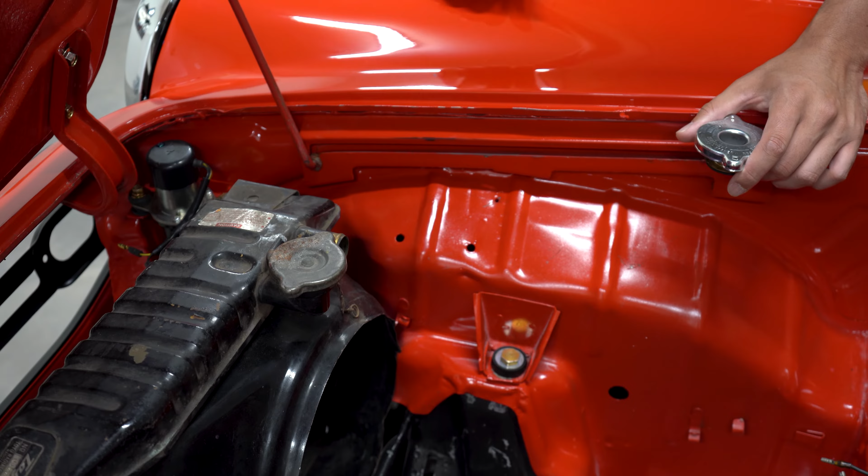All right, so without further ado, let's go ahead and dive right in. To start off, we're gonna be looking at the radiator. What we're doing is we're gonna be replacing the radiator cap. Now, this is one of those maintenance things that you have to do down the road. And we're gonna be removing our old one.

As we removed it, some stuff just started coming off. And as you could tell, I'm pretty sure that the rubber has seen better days. Wow, I mean, I'm thinking this is probably made of brass, but we're gonna be replacing it with a new one.

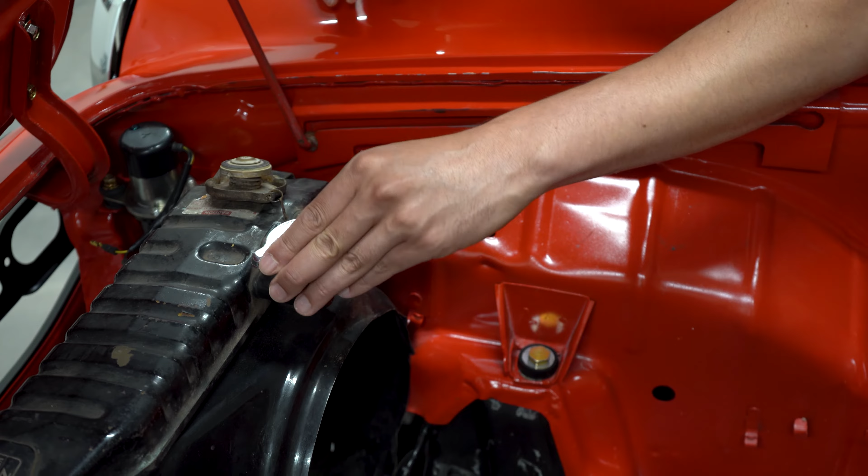And let's put this in here, let's see. If it fits, there we go. All right, looks like it's gonna work. Oh, there it goes, all right. And that's a nice fit.

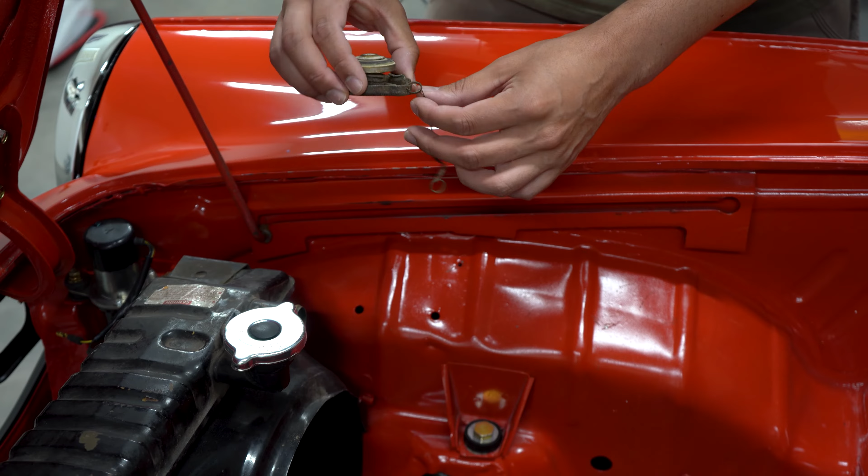So an interesting thing about this one is that it came with kind of like a little 'don't lose me' chain. I don't know if this one has that. I don't think so. But we're gonna go ahead and store this away because we like to keep all our old parts. Some of them we sell, some we don't. But in this case, we're gonna keep this one because we just wanna keep it.

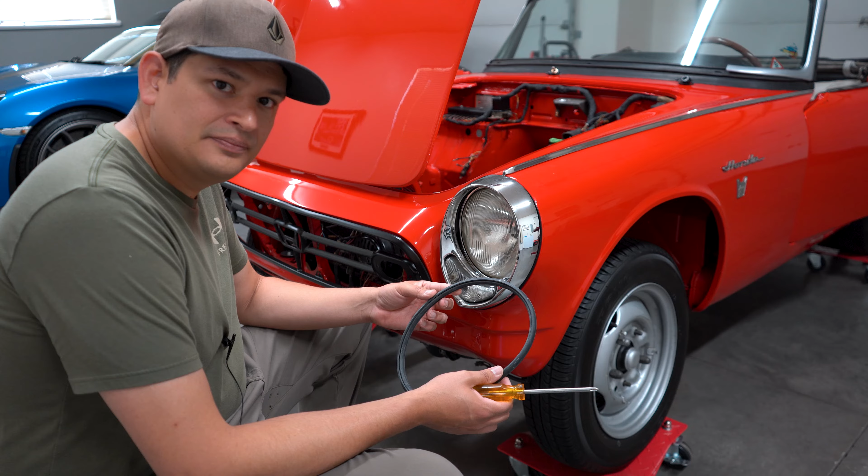So here we have a new headlight rubber gasket just to keep the elements away from this seam right here. And so what we're gonna do is we're gonna go ahead and put that in there. And you would be surprised that this headlight is just being held on by some screws, nothing too complex.

But if I'm correct, this goes behind there. I'm thinking that's right. We should double check. Let me double check real quick, but I'm gonna take this off anyways.

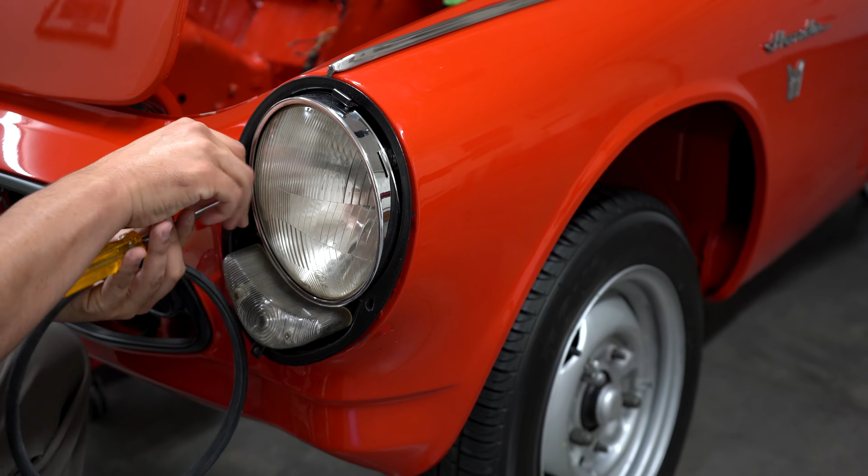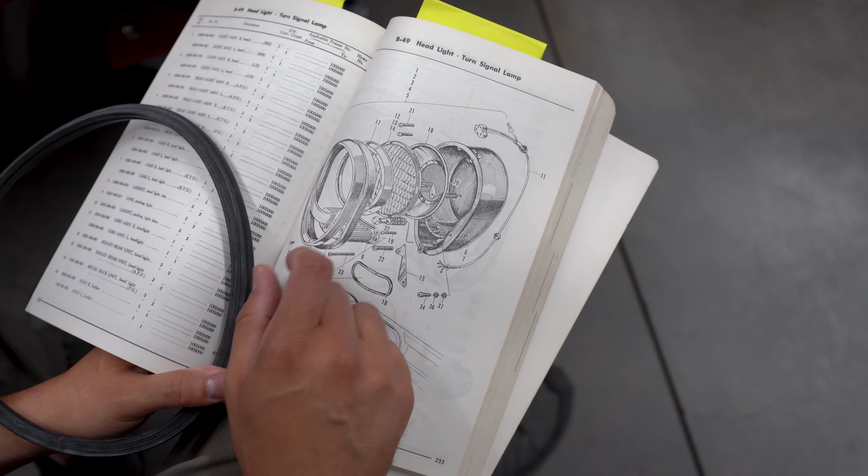Okay, so here's our diagram for a headlight, and it shows that the gasket goes behind the chrome trim. Now let me tell you something about these older parts catalogs or service manuals. I believe, because this is from 1968, that these were hand drawn. I mean, they really didn't have the technology that we had back then for computers and stuff like that to render everything. So I really think all of this was hand drawn.

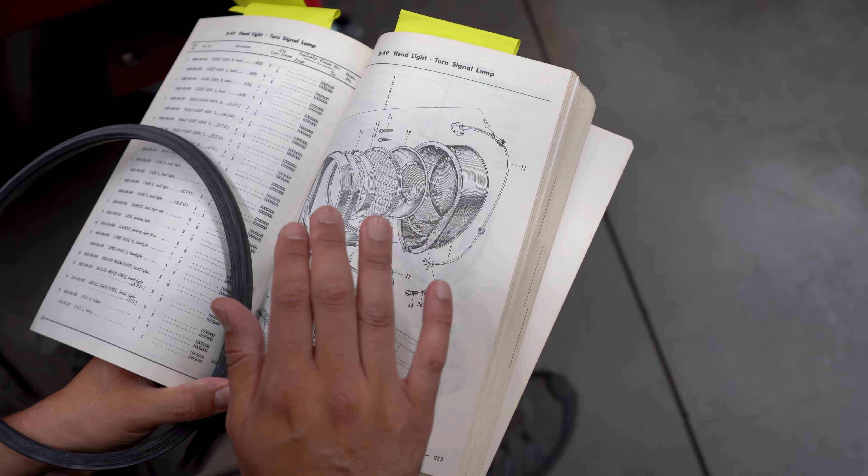But even though it's neat, sometimes parts don't look the same at all. And we kind of found that out when we were looking for other stuff. If you look at this gasket right here, it looks a lot different from the diagram, but this is the right part. It's just one of those things where they were drawing them back then versus actually having a computer system or program that did that.

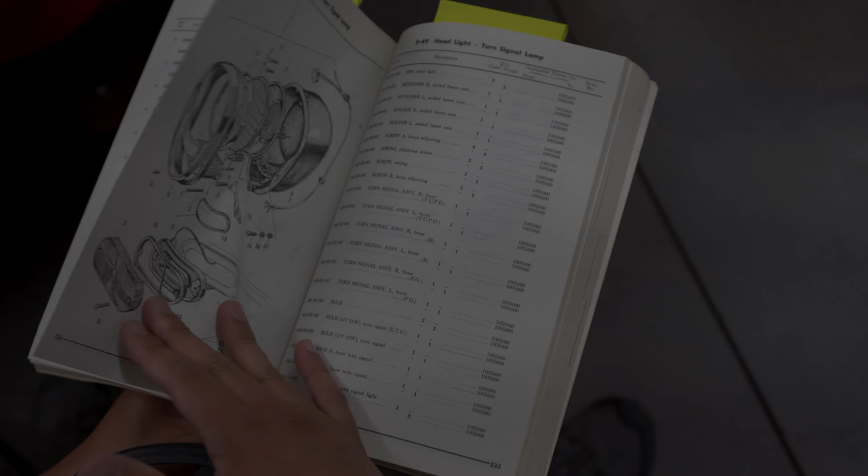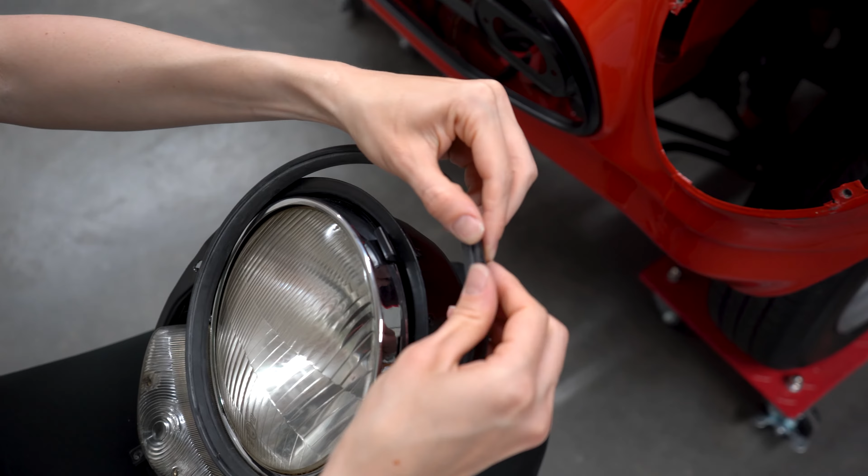So Elise is gonna be doing the headlight gasket. All right, Elise. Okay, so we took some time and really looked at this thing and figured out which direction goes which way. So it's got this flatter side that lines up nicely with the body. And then on this side, it's got multiple lips - a front lip and then a secondary lip. What we figured out is that the secondary lip goes over here and is able to fit on this housing.

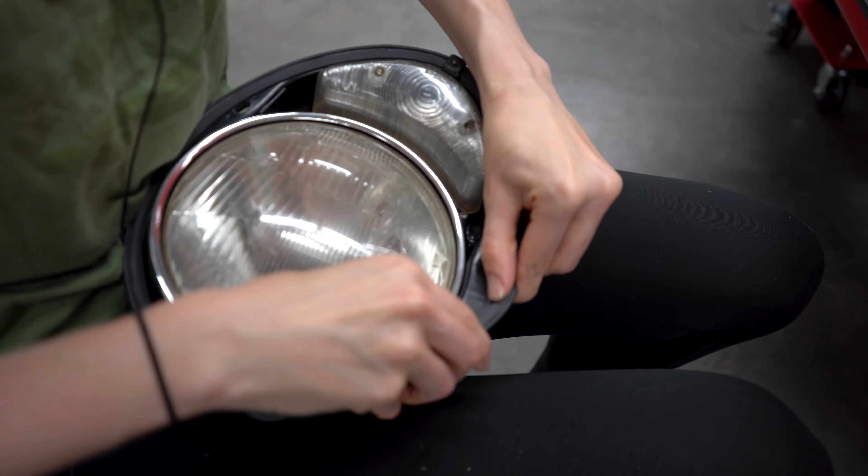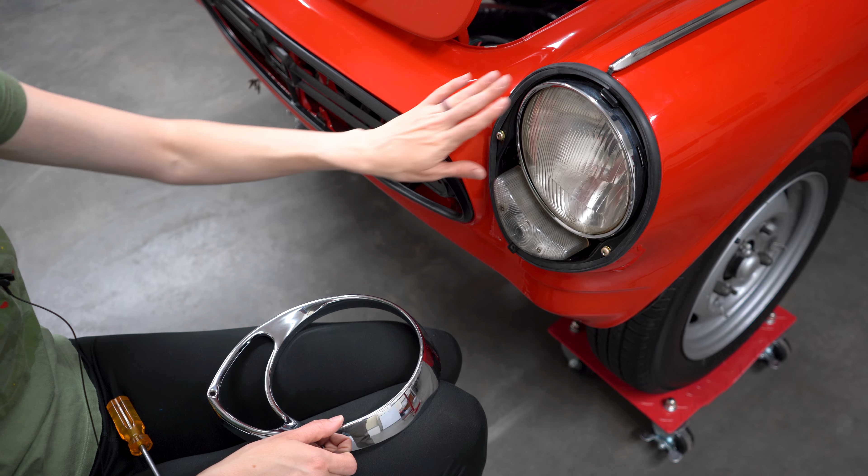And it's a good snug fit. It seats on really nicely. Okay, now we put this whole thing back in. It's in nice and snug, and now we'll go ahead and add in the screws. Now that this is all installed and attached, we're going to go ahead and secure the chrome.

Both headlight gaskets are installed, and let me tell you, it makes a big difference because before, the headlights were loose and there was just a noticeable gap. So if you're rebuilding an S chassis car, you're definitely gonna want some fresh headlight gaskets. The great thing is we actually figured out the direction of the gasket because I initially installed it incorrectly, but she got it down, so kudos to her. This looks great. We rebuilt our headlight, got the covers re-chromed, and now we have a new rubber gasket that's gonna keep any of the elements out of it.

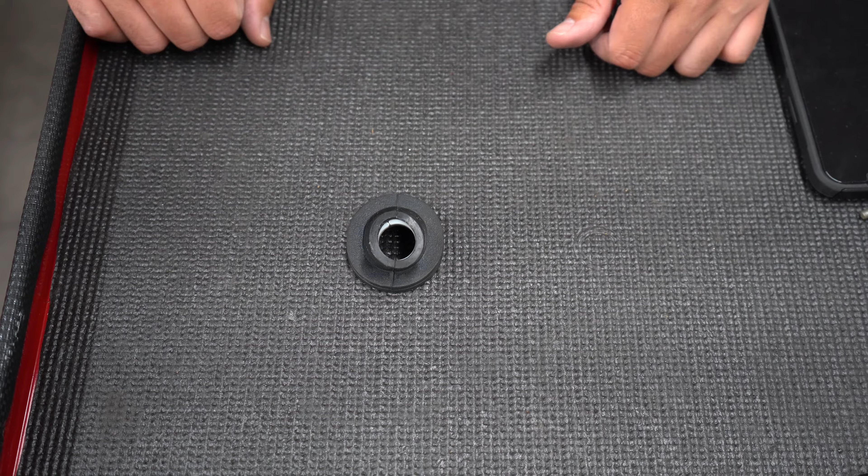Okay, so this was the part that Ronnie sent us, and this goes to the steering assembly. It's kind of like a long rod that goes to the steering rack.

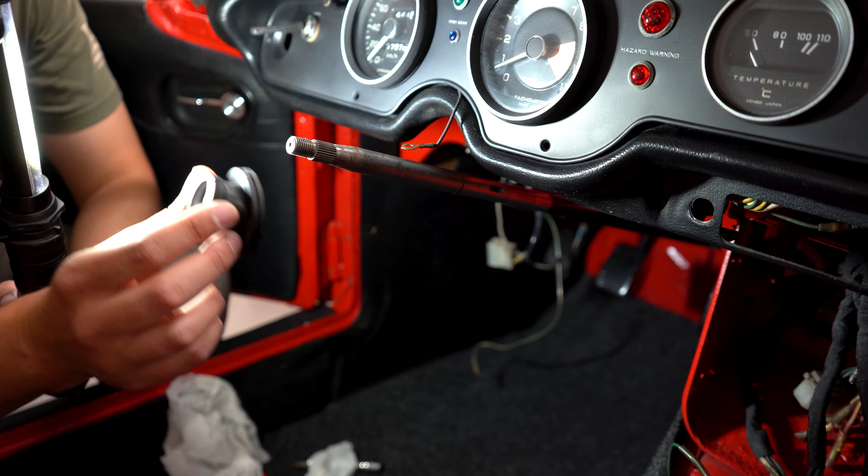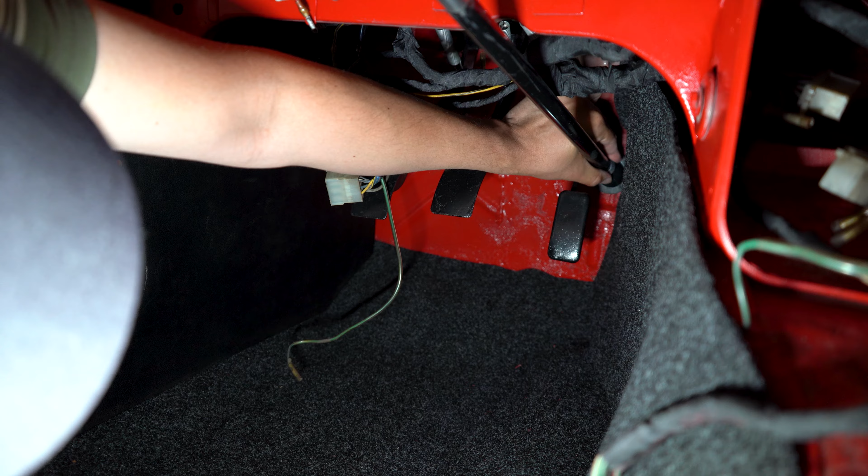What we have to do is put it on, slide it in, and then actually get it sandwiched between the car as far as the engine bay and the interior. So let's go ahead and do that. It's gonna be a tight fit. We're gonna look at the parts catalog and then get it done. This goes on here, and we really can't get the camera where it's gonna go because we have to put it all the way in the bottom. But this is important because it's a separation between the outside and the inside of the car. So definitely an important piece.

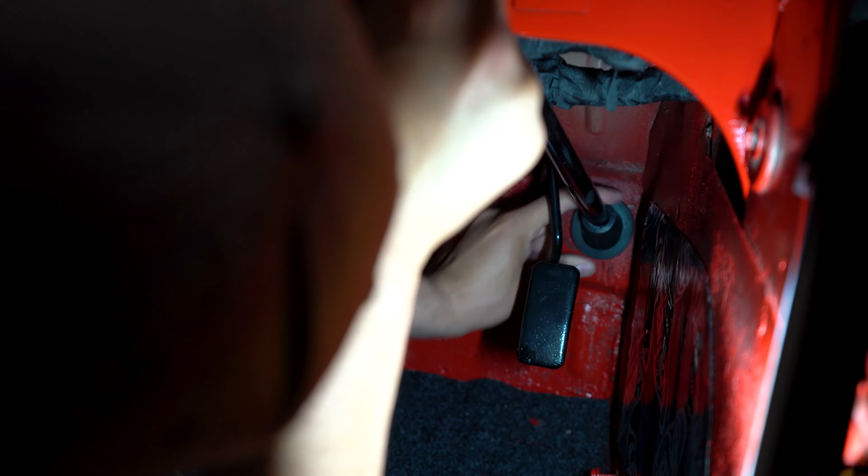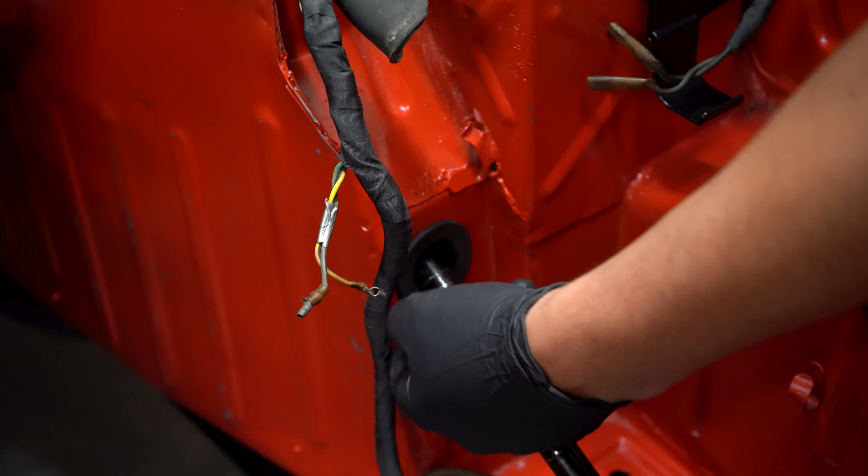Okay, so this was a pain, but we got it in. What I did is I actually pushed it through here, then grabbed it and pulled it out, and then put it in, and was able to get it pushed in slowly. I used a flathead to get some of the harder parts because I couldn't push it with my finger, but we got that bushing in there. And again, big thank you to Ronnie. Awesome.

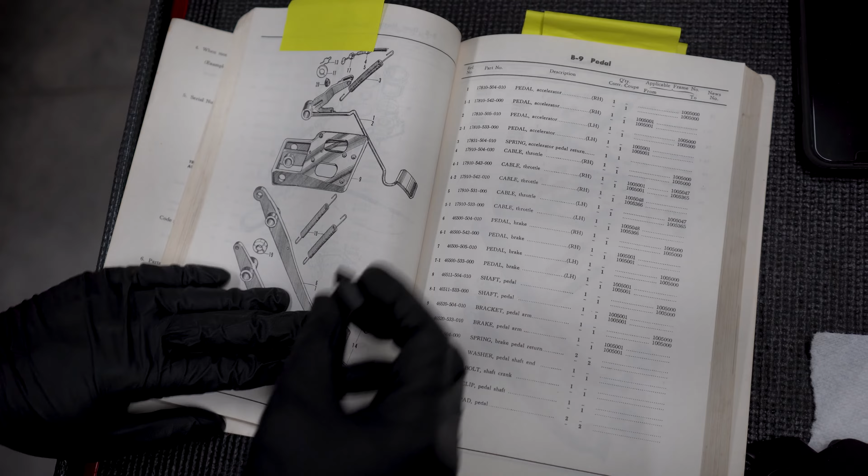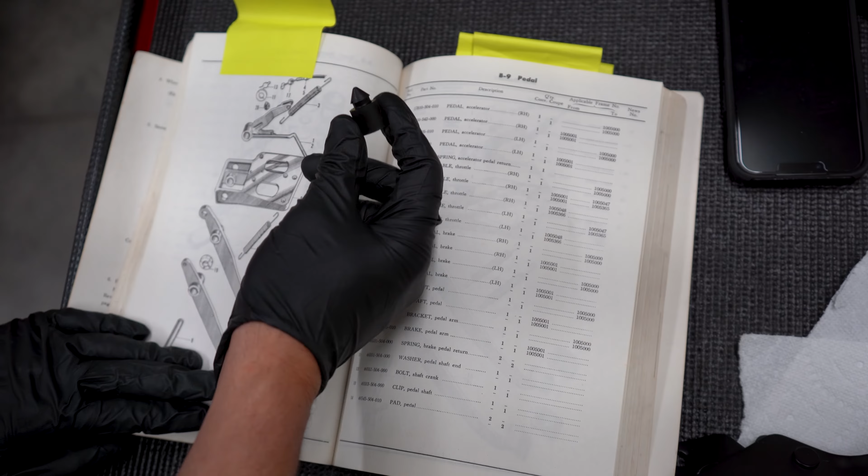Okay, the next thing we're gonna be doing is putting the bump stop for what looks like the gas pedal, if I'm correct here. Let's see, 1, 2, pedal accelerator. And this is gonna be really important. I'm just gonna put it in there because we can't get an angle of that with the camera, but I wanted to show you guys this was missing, and this is one of the small things that we wanted to make sure we had.

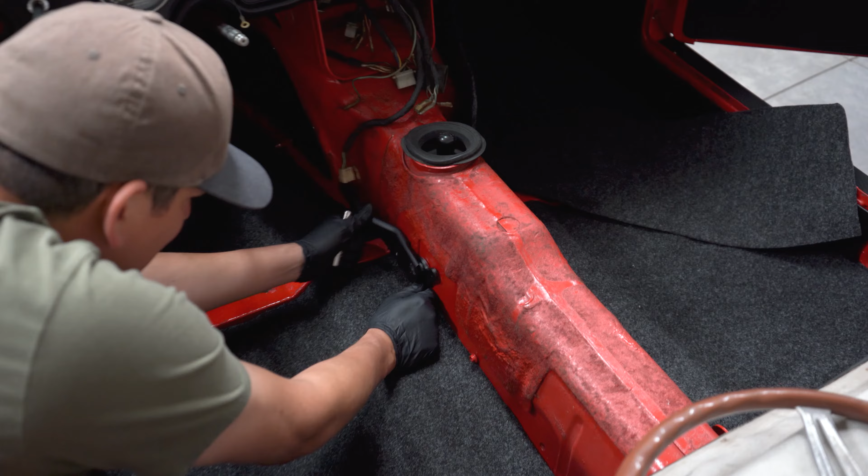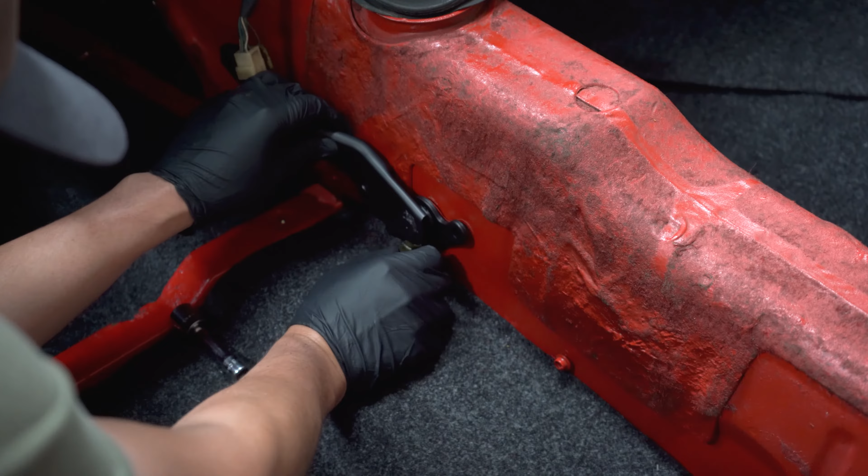All right, so this is our e-brake assembly, and let me tell you, it looks really good. We had it Cerakoted, and the reason why is because it's got kind of a gear system in here, and we wanted to make sure that if you painted it, it wouldn't get caught up. So we're gonna go ahead and put this on. Let's do it. All right, pretty simple install. We're gonna have to hook up all the actual e-brake setup later on, but for the time being, we're gonna put this in here because there is no better placeholder than where it's supposed to go.

It's the drifting mechanism.

And the thing about working on a car that people have restored or worked on is that this car was repainted and then these bolts were re-zinced. So the mating surfaces are gonna be a little bit harder to get on, because now they have to work through that extra coating and paint and everything to actually make them go in. But what I like to do is start and then back out, and the reason why is that it's gonna get that debris out of the threads. So this time around, it should be a little bit easier to put it on.

And there you go, guys, our e-brake is on.